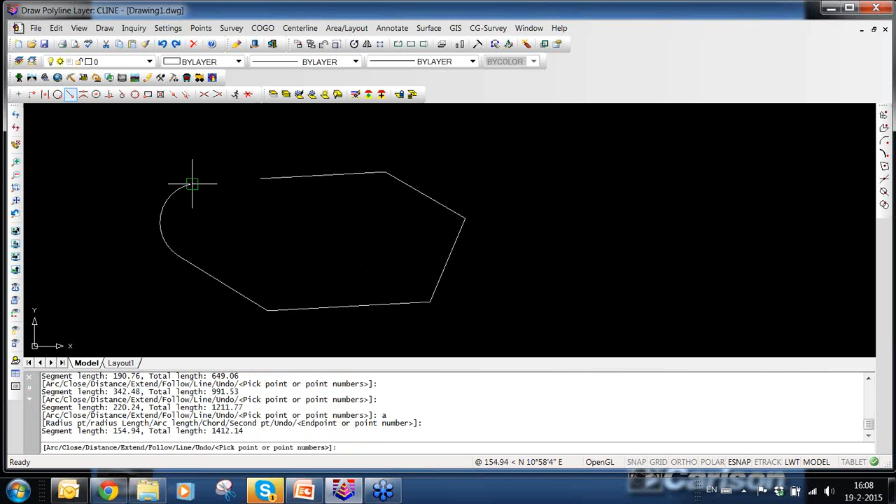Then of course it's a CAD system, so you have all your layer information. You can lock and freeze layers. You can do all sorts of drawings, so you have your polylines, and you can draw. You can create your arcs and everything, all the tools that you would be used to. Let's see what we can do here.

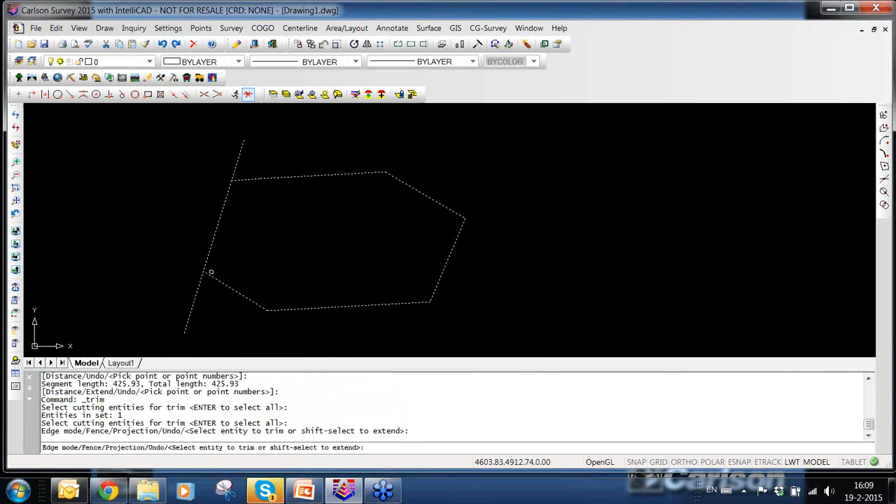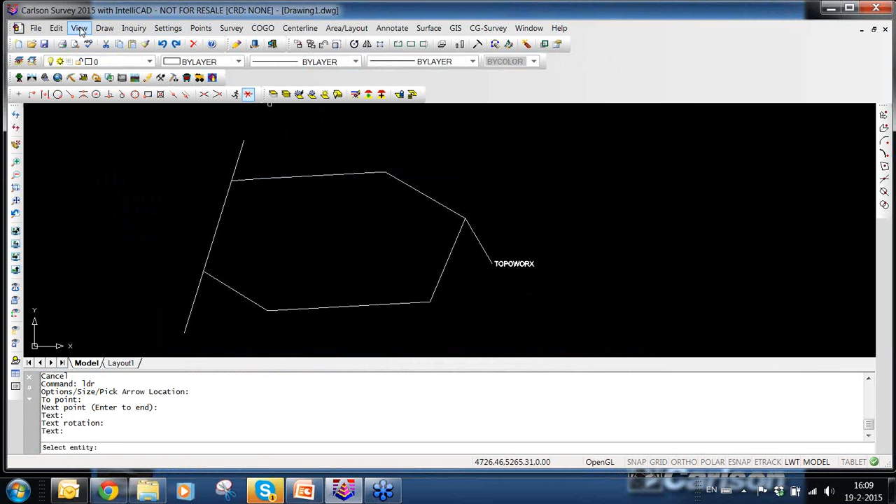Just draw another line, and you have your tools for trimming as well. So that's also standard. You have your leader with your text, all sorts of information. Let's see what we can show here. So all sorts of whatever you're used to with your CAD system, or what you would expect from a CAD system, is available here. So it's really a CAD system.

Okay, let's go back to another example. As I mentioned before, cleanup is very important. So, for instance, I can open a file, and it's a DXF file. Let's have a look at the file.

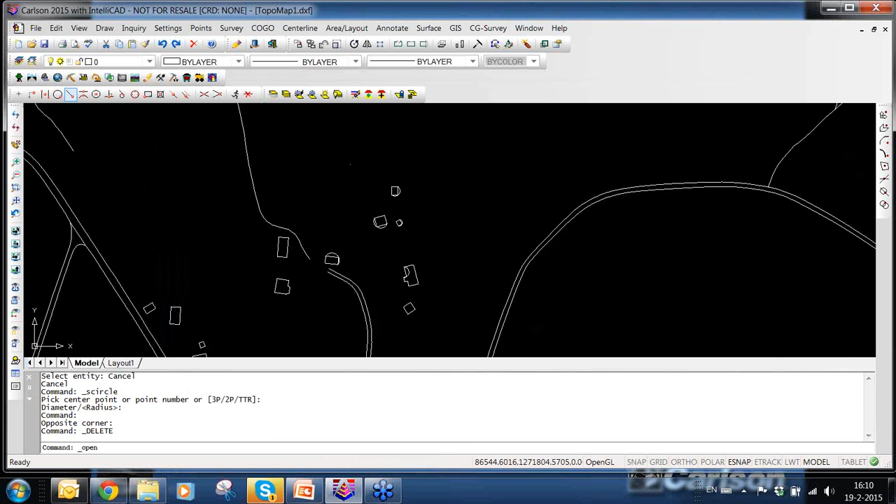As you can see, this is a large file. You can see here on the right-hand side, this is nearly 14 MB. That's a pretty serious file, especially if you want to put it into maybe your small data logger with SurvCE. So let's open this and see what it looks like. It's not spectacular, it's a simple topo file.

Cleanup: we go to drawing cleanup, and here you see a list of checks that the software will do. For instance, it will remove duplicate points, remove duplicate line work, erase all sorts of blank entities, and join line work with the same endpoints. That's very important for your closed polylines. Also, it will remove empty layers with no entities, and it will convert all sorts of entities that SurvCE doesn't like into polylines.

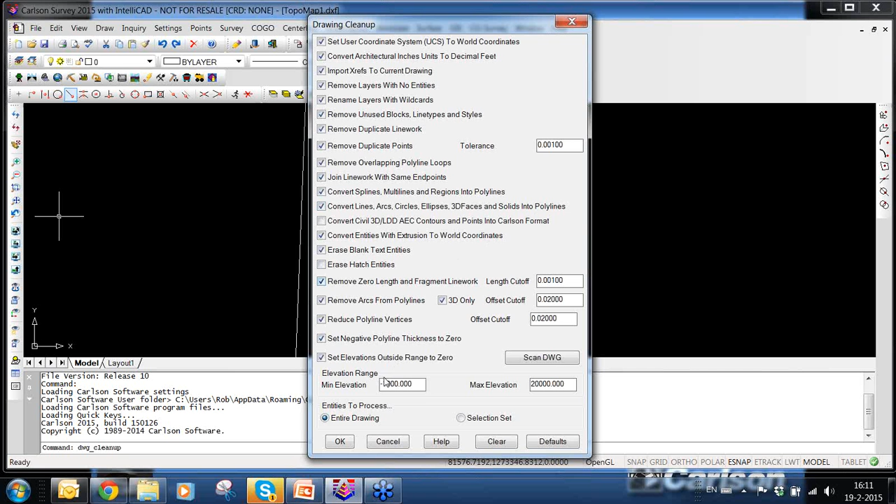So there are some entities that SurvCE doesn't like, solids for instance. You'll have a problem displaying these in SurvCE unless you use TopoWorx and cleanup to convert them into polylines, because SurvCE likes polylines as the basic entity in CAD, but doesn't like some of the other stuff. Okay, so let's see what happens.

So this takes a little bit of time because it's a large file, but this is a very useful option, and we have customers that basically purchased TopoWorx or Survey mainly for this option, because it's really great, not only to compress your file and make it smaller, but also to fix issues like polygons not really being closed or having overshoots, all that kind of stuff.

So it's now working on solving all these issues. It takes a little bit of time, like I said, it's a 14 MB file. So let's see what we'll end up with. What we'll see is the difference in size. Doing this cleanup should really result in a major reduction of the size of this file.

So it's still working. What it will also do is use the latest version of the DXF or DWG format, and that usually makes the file a lot smaller too. I think it's nearly done now. Checking the elevation range. Okay, so here's the report.

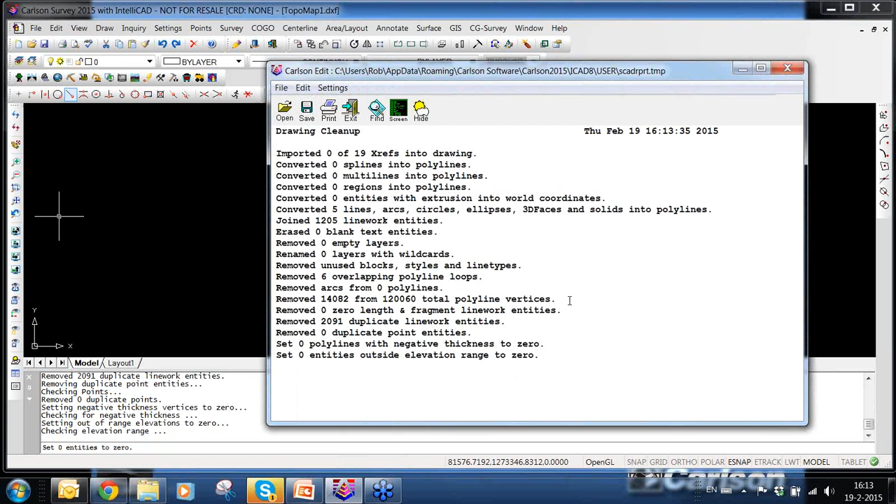So you see a lot of polyline vertices were removed, and line work entities were joined. It's very useful, this is also very important. There were some entities that SurvCE will not like, and these were converted into polylines. So that all looks pretty good.

And what I can do is save the file as a DXF. It's a standard DXF, and I can call this cleanup. And you can already see the reduction in size. So this is the original one, which is nearly 14 MB, and this is the cleaned one, which is 4.5 MB. That's a reduction of nearly 70%.

So obviously, this file will give you, only because of its size, a lot of problems in SurvCE, and this is a file that is much smaller and cleaned up. A lot of issues were solved, so that will work perfectly in SurvCE.

Okay, let's go to another example: preparing your stakeout. That's also important.

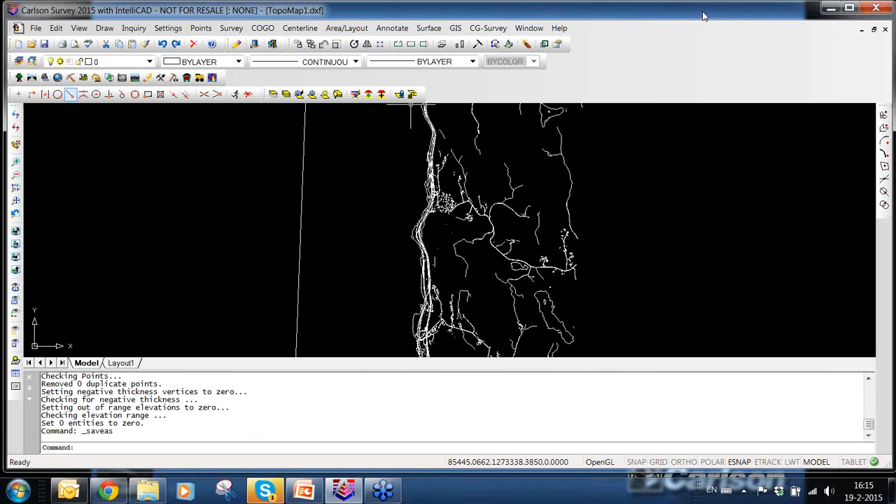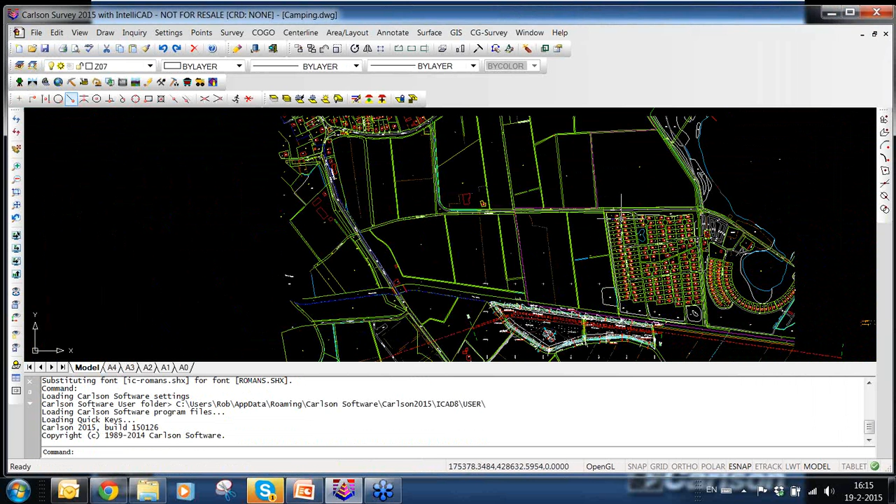So let's close this for a moment, and let's open a file. See a file here. Okay, so this is also a pretty large file. As you can see, if I zoom out, this is a big file. This is not a file you would want to load into SurvCE.

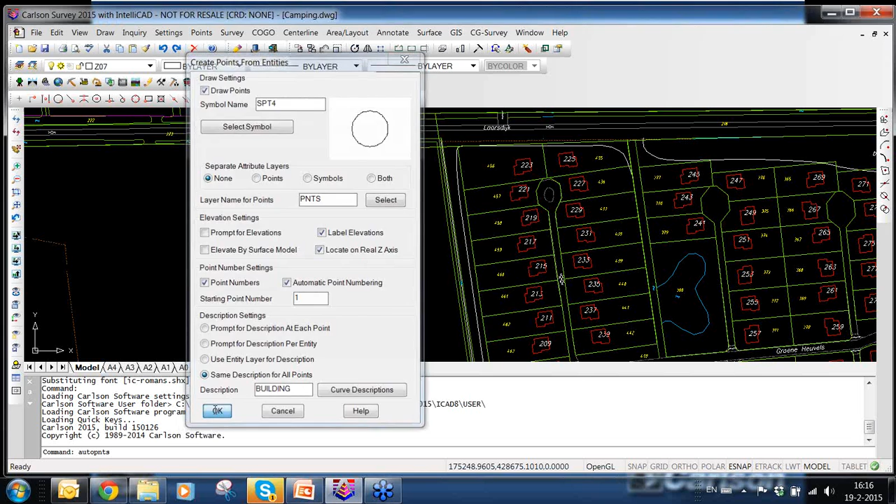So let's assume you just have to stake out some points. You don't need a complete DXF, you just need some points to stake out, and I can easily pick them from the map. So what I will do is I will go to COGO and say create points from entities. As a description, let's call this building like this. I'll just select points and give it a name, the CRD file.

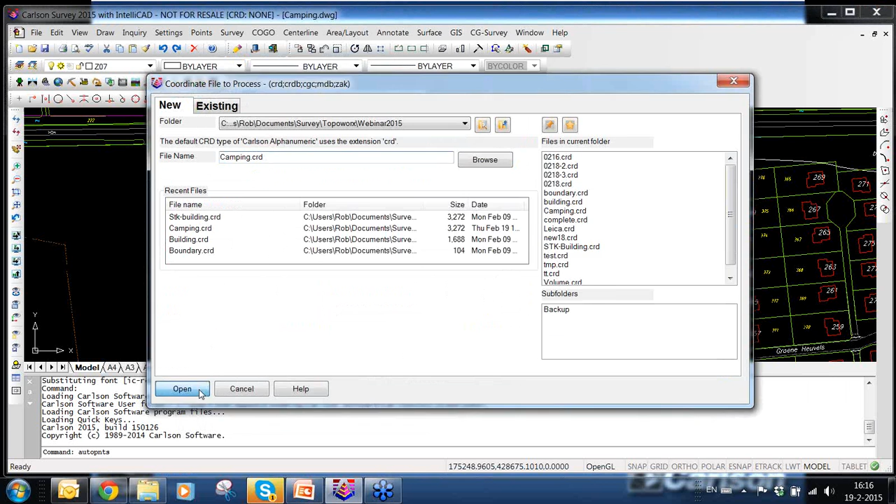You can already see I'm already creating a CRD file, so that is a SurvCE file. I'm not creating an ASCII text file that I have to later convert into the SurvCE format. I'm already creating a file ready for SurvCE. So I'll replace the current file, and I will take the points from this building, and here and here and here, just like that, and it will start to create my points.

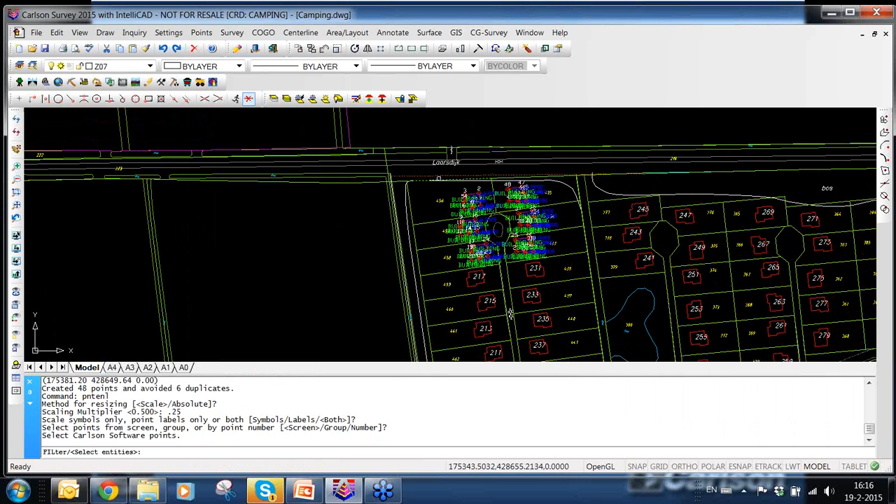It looks a little bit sloppy, so I can resize this a little bit like this, make it look a little bit nicer. So I've taken all these points, and I've immediately created a CRD file for SurvCE.

Of course, there are other possibilities. So if I would go to survey and to data collectors, then you see that we also support Leica, and also, for instance, the Leica DBX format. So depending on the area where you live in, the DBX format can be a standard. So you could be on a construction site where whatever instrument you use, everything has to be in DBX format.

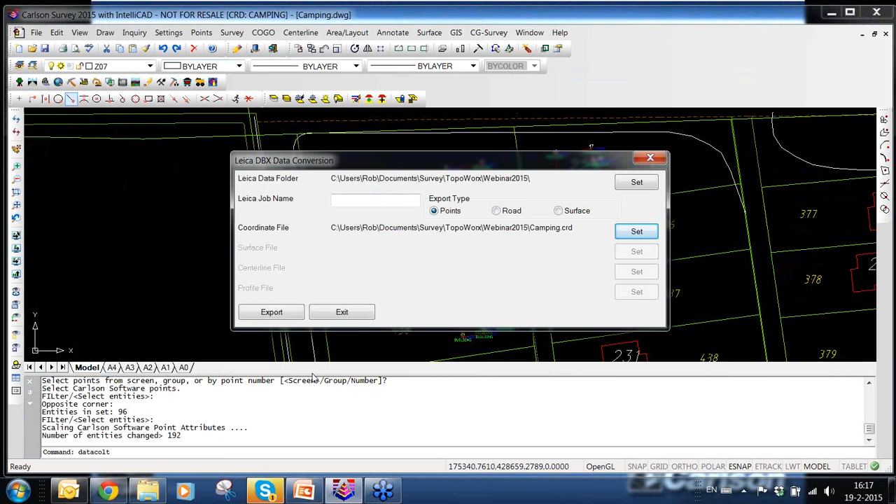So for TopoWorx, that's not a problem, because you can import DBX files, but you can also export DBX files. So you create a DBX job name for Leica, and you select the coordinate file that we just created, and then you can create data for Leica users. So just 100% focused on SurvCE, you can also create other formats for import and export.

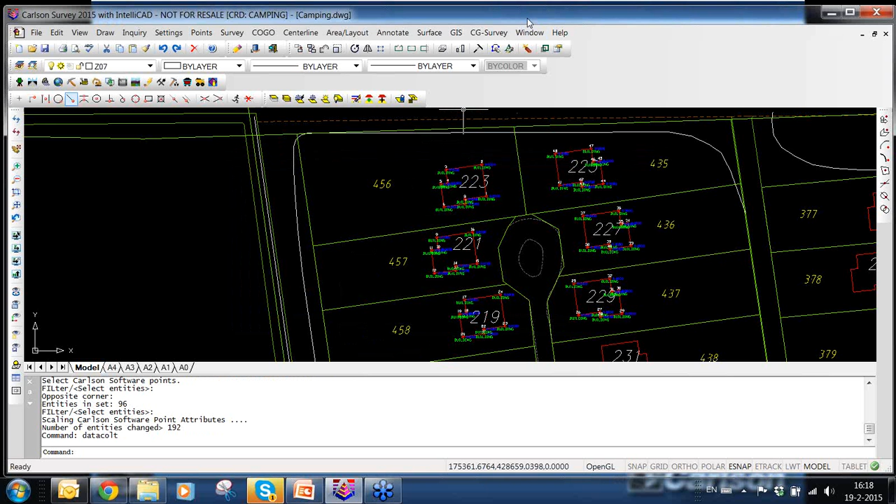Okay, now let's assume the situation where somebody has done the stakeout and you want to check the quality of the stakeout. So you want to prepare a cut sheet. So let's reopen this like this, and let's assume somebody's done the stakeout with SurvCE and comes back with a SurvCE job with the stakeout points, and we just want to see how well he's done.

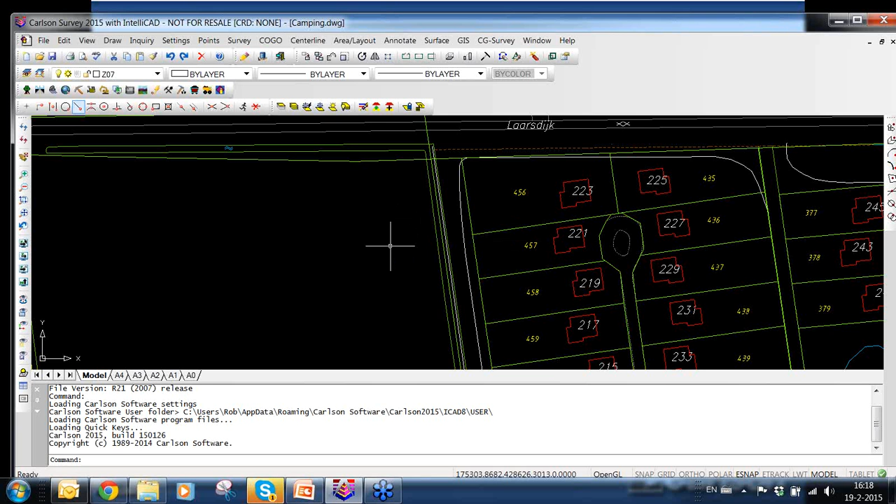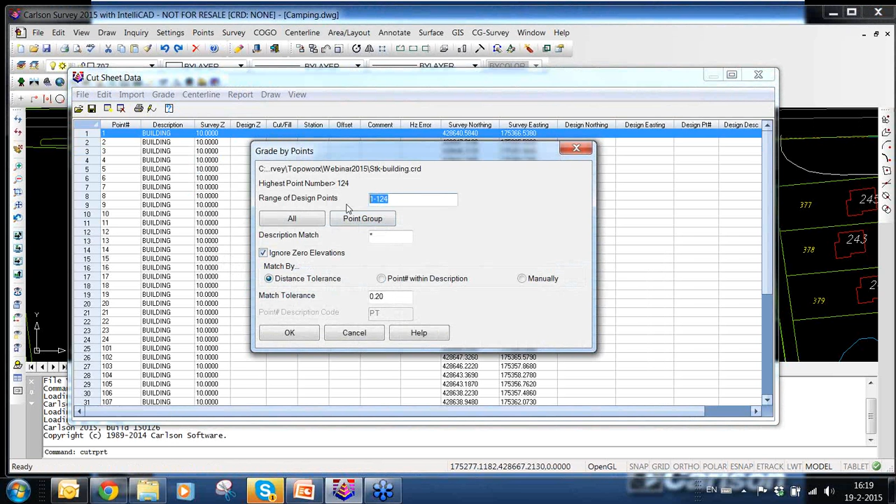There are also some cut sheet options in SurvCE, but we'll just look at what we have available here. So we go to survey and then to cut sheet, and then we'll import our cut sheet file. Let's assume the guy outside created a CRD file called stake building. So we open this file, and I know that the first 24 points were the design points, and I'm going to check on a tolerance of 20 centimeters, and I want to check the horizontal error. So there we are. I have a nice display, and I'm seeing my sorted horizontal error, the variation from 0, which is quite good, to 6 centimeters, which is a little bit much.

Again, you see how quick this goes. I just take the CRD file from SurvCE. I don't have to export to an ASCII file in between, and then read in the ASCII file into Excel, and in Excel try to make a sheet like this. It's already available in TopoWorx.

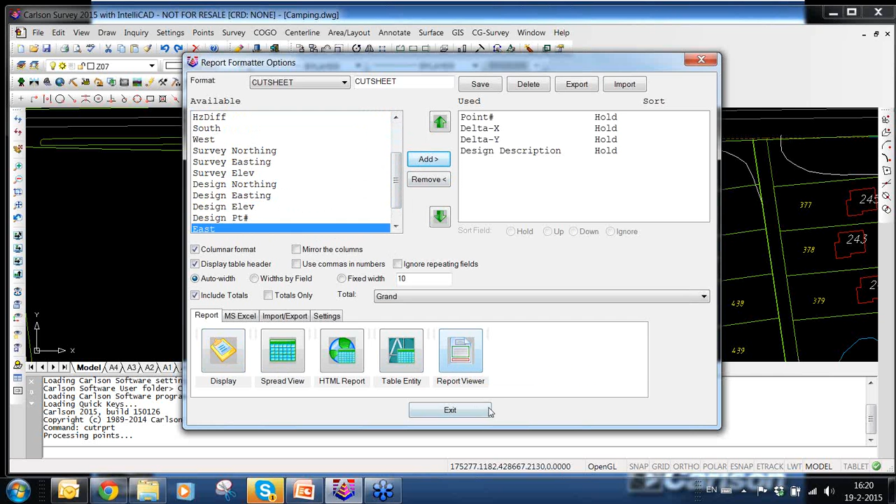I can create custom reports, so I can say create a report, and in my report I want to have my point number, and then maybe my delta values, maybe some comment, maybe my design description or whatever, and I can export this. I can export it as an Excel file, as a spreadsheet file, or I can simply display it and export it. So I have all these options available.

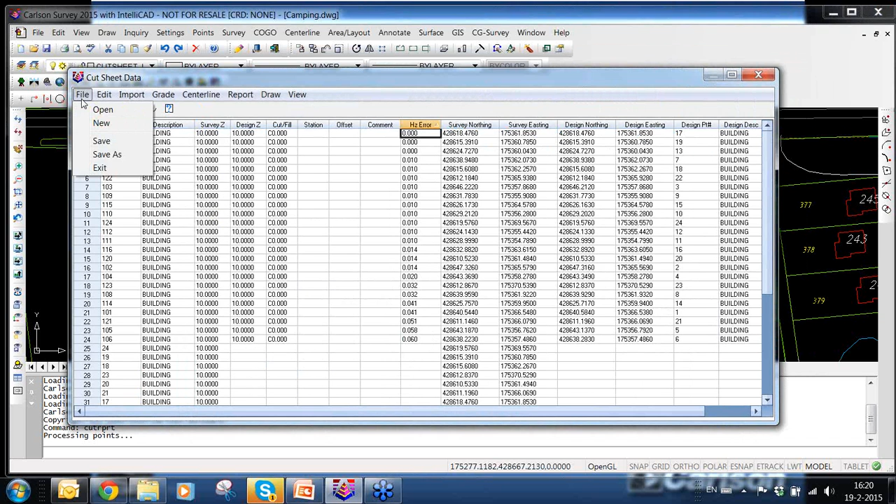What I can also do is show this information graphically. So I can say draw labels, because I want to see my deltas. We don't need this anymore, we need to change this. So then, as you can see here, you get the graphical information.

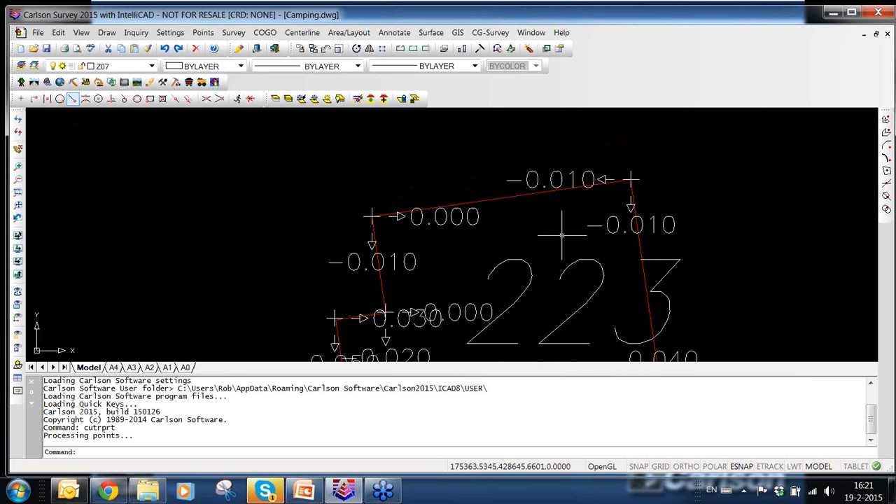So here, for instance, this point was a 0 difference in the easting and 6 centimeters in the northing, and this was 1 centimeter and 1 centimeter. So you can also immediately from the SurvCE job read it into TopoWorx, create a report, and even create a graphical display. So that's one of the useful features.

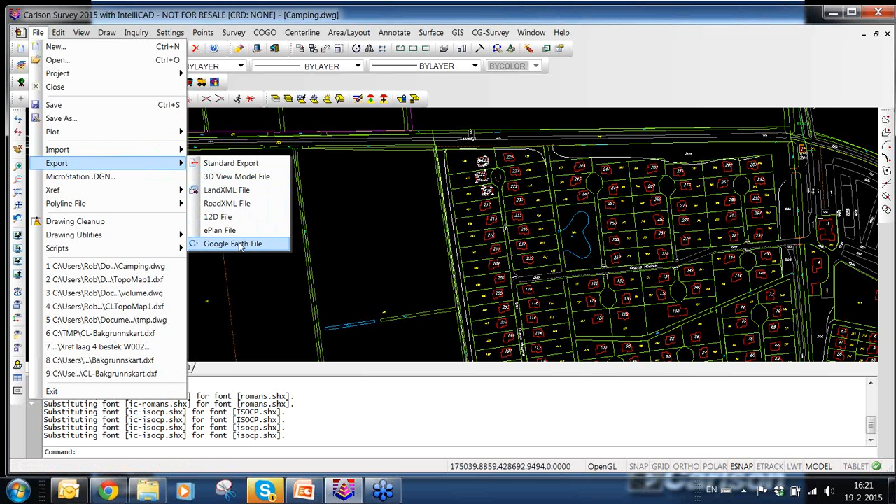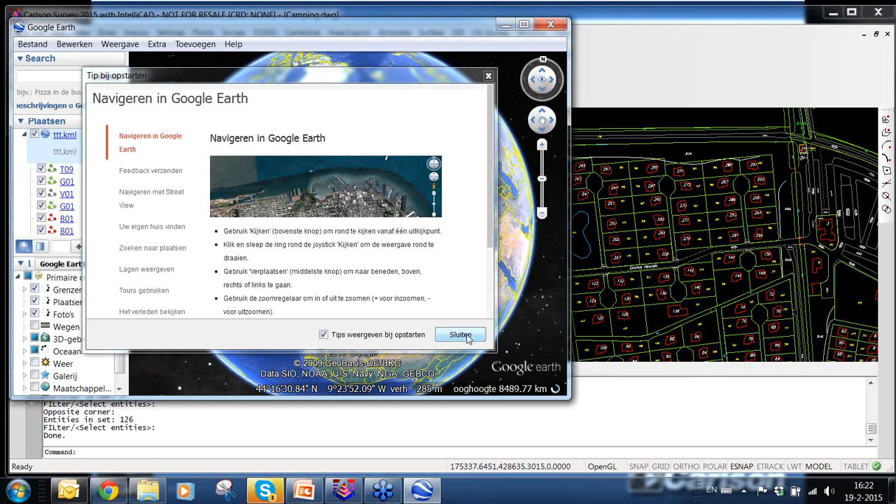What I can also do, which I think I mentioned before, is export using a Google background. I can export this as a Google Earth file, replace the current one, and make a selection like this to see what happens. I'll use Google Earth, and if my coordinate system was right, we should see the same information on the Google background. It's a bit of a challenge since part of my bandwidth is used for the webinar, so I'm not sure how this will work out, but we'll see.

Okay, so here's my information. You see that it did a pretty nice job displaying the information. So that's another option, a very useful one for sharing data.

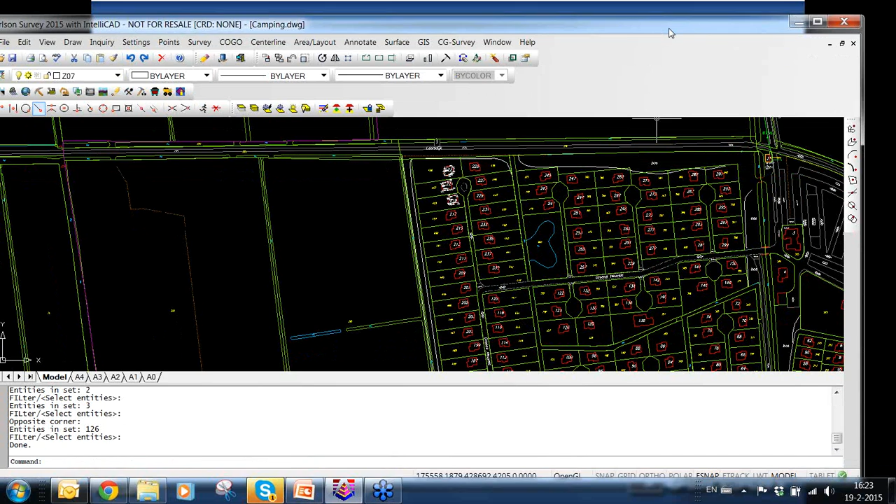Let's move over to another example: field to finish. Let's close this for a moment and go to field to finish. What a lot of people do is some field to finish in Carlson SurvCE, then create a DXF file in SurvCE and bring it into CAD. But they don't really like it because of issues - font size not being correct, problems with text size.

My advice would be, don't do that. Don't create a DXF file in SurvCE. Just bring your CRD file from SurvCE into TopoWorx and do your field to finish here, because TopoWorx is much more powerful and will save you a lot of time and frustration.

So what we'll do is set our coordinate file like this. I've just brought in the coordinate file from SurvCE, and then I go to field to finish, draw field to finish, and here I have a lot more control over my layers and whatever I want to do. This is the information from outside, and this is my code library - as you can see, I have much more options for my symbols and lines and whatever I want to do with the file.

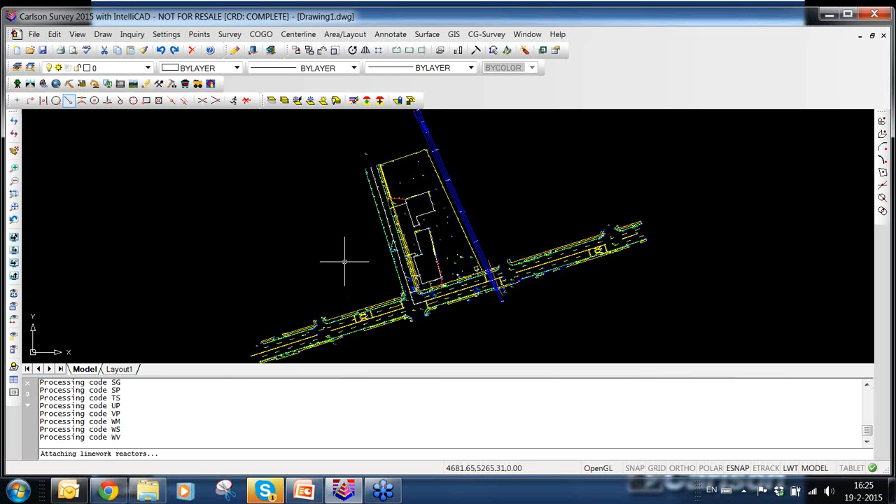At this point I can simply say OK, and it will start to process the code files and the special codes, turning it into a drawing. So here's my drawing. You see how easy that was and how much more control you have compared to SurvCE.

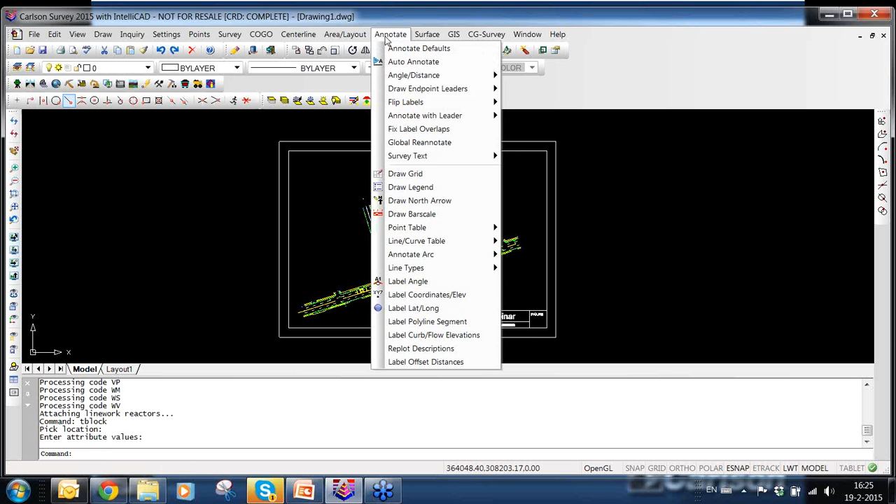And then I can simply turn this into a professional DXF file if I wanted to. Let's put something around it and give it a title like this. I could even put in a north arrow if I'd like, place it over here, and export it as a DXF or DWG file. So that's how easy it is to make a professional drawing straight away from SurvCE.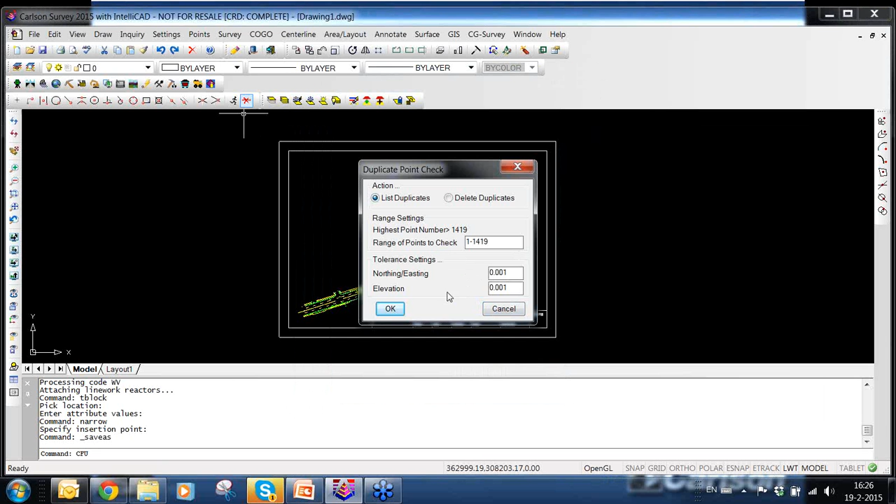What we haven't really discussed yet is the coordinate file utilities - these work on your SurvCE job file. For instance, I can very quickly check for duplicate points. I can set a tolerance of a millimeter, and it says no duplicate points, so that's good news.

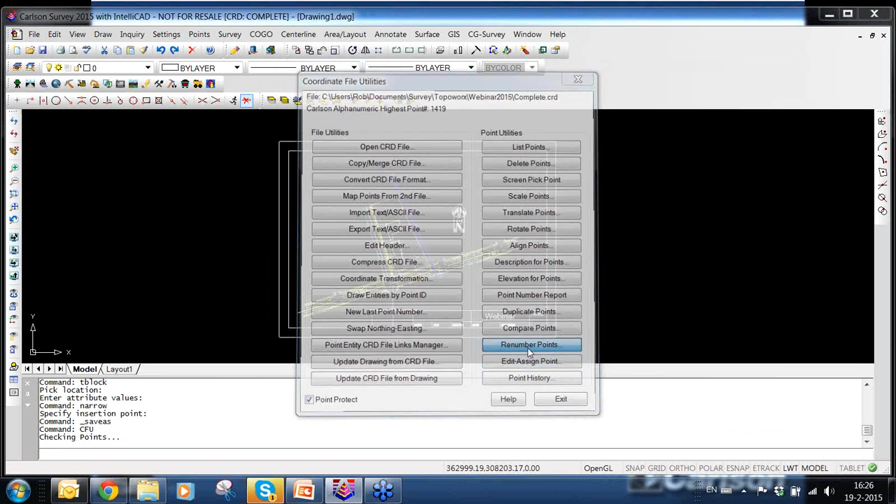I can also very quickly renumber the points. My points are now from, let's say, 1 to 1400. It could be that I don't like that because maybe there's going to be a conflict with other points, so I'll renumber this and start at 2000, and it will start to renumber the points. If you list the points now - list all - you see they are automatically renumbered.

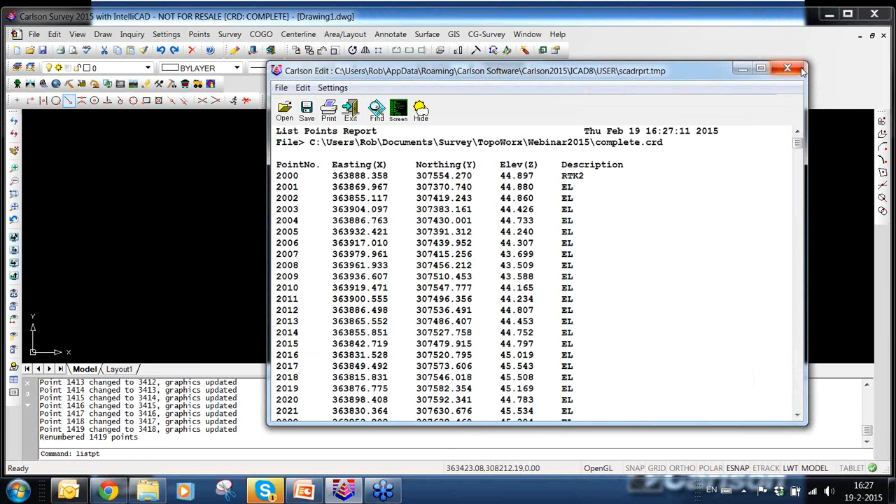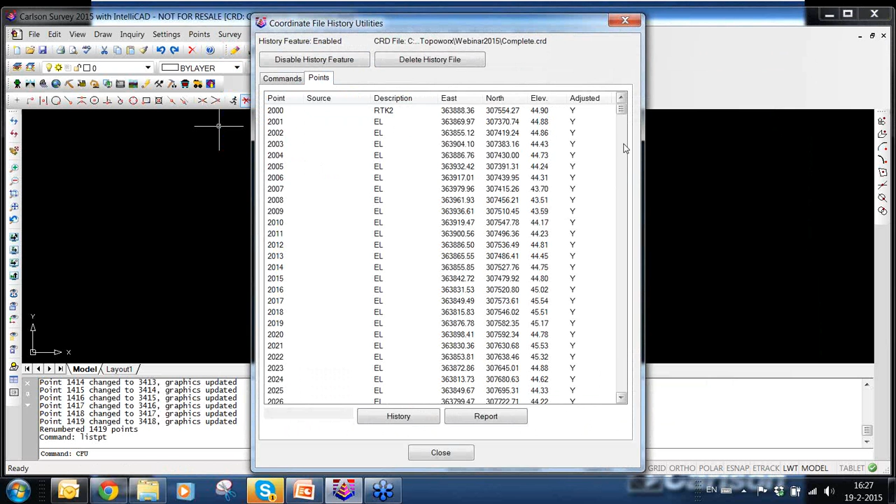What we also have as an option is to look at the point history. As you can see, I've already renumbered the points a couple of times - this is what I did today, this is what I did yesterday, and I also added a couple of points. This is very important if you work with multiple people on the same software and project - you can exactly see what has happened to the various points, the commands, and the points that were changed. That's very useful.

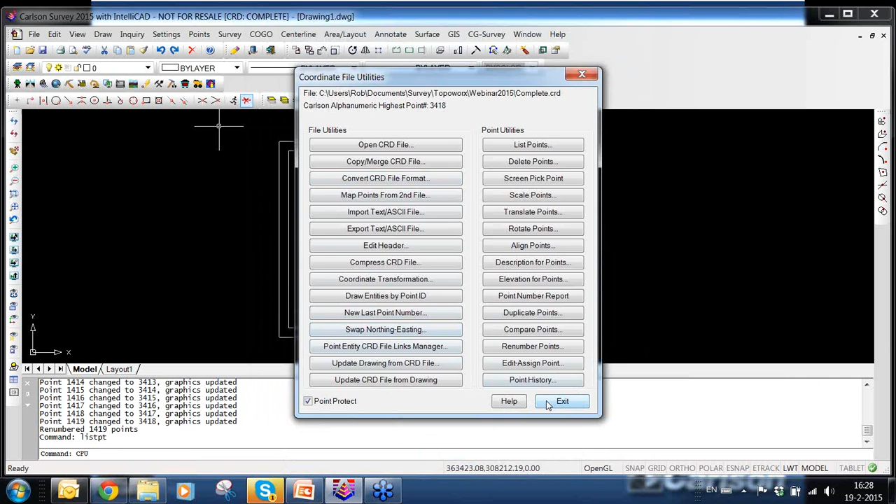Another one I'd like to point out: swap Northing and Easting. This is also very important if you made an error reading in an ASCII file and swapped the Easting and Northing. It seems like something obvious, but it actually means your whole drawing was mirrored. With swap Northing and Easting, you can fix that immediately. So that's extremely useful.

Okay, then let's look at the final example: volumes and profiles.

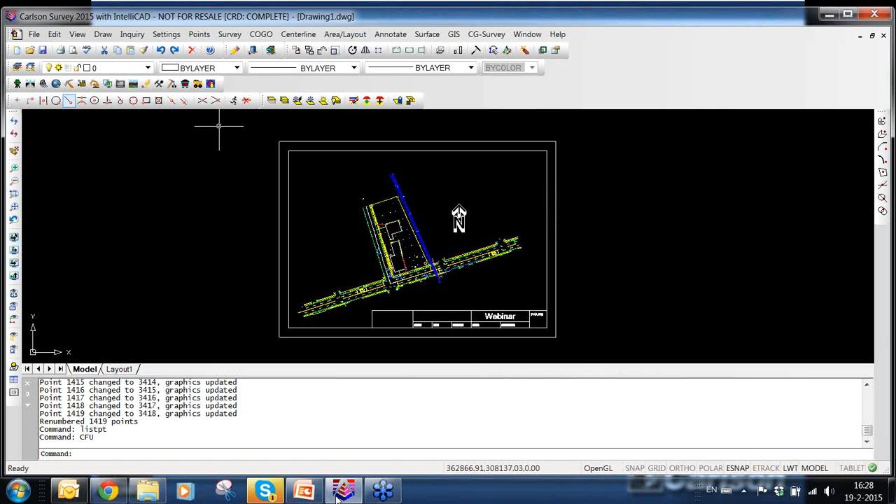Now, volume and profiles. Again, you can do a little bit of that in SurvCE, but of course in TopoWorx your options are much more powerful.

So let's close this and let's open this file. So here I have a 3D model, triangulation model, and I can have a 3D look in the 3D viewer. This is something that SurvCE doesn't have, but I can select it and I can look at it in the 3D viewer and go around it.

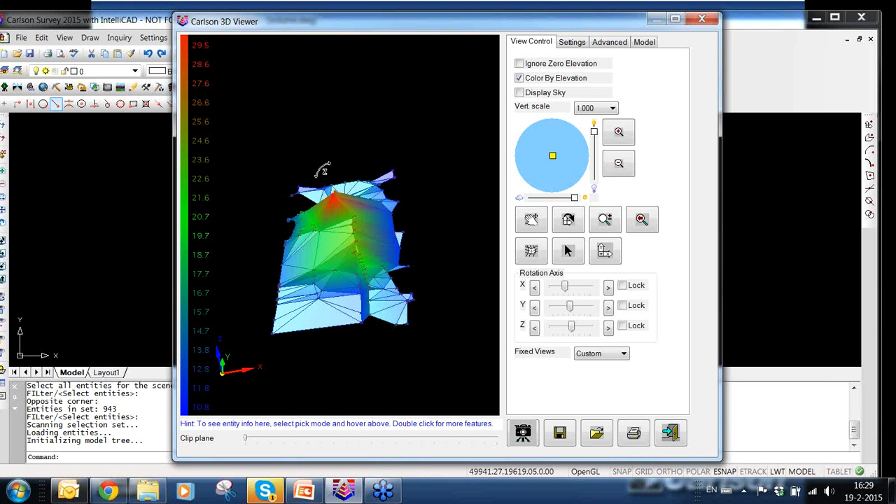Maybe do a little bit of exaggeration of the height to get a better view. So that's a very useful option.

Another useful option is of course profiles. So what I can do is I can make a quick profile. It's available in TopoWorx, and I can say let's go from north to south like this. And here you see my profile.

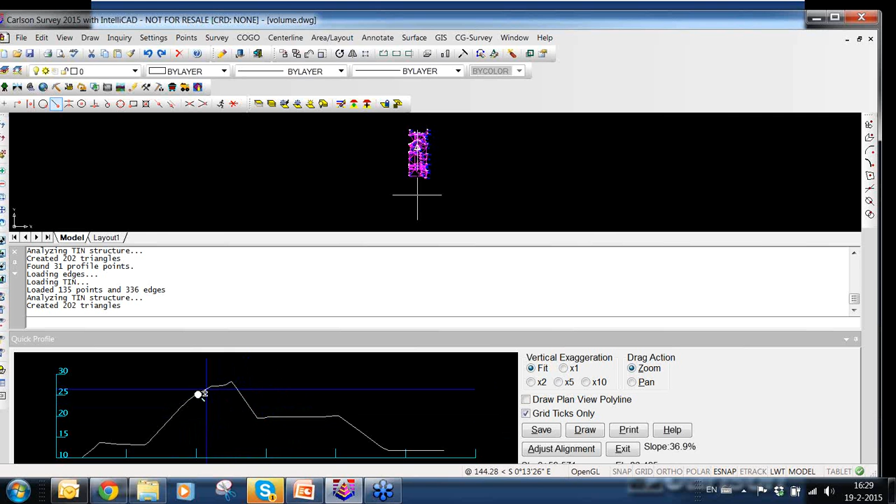You see my height, you see my slope available as well. Adjust alignment means that I can actually move my quick profile and change the direction of it. So that's a very useful option.

I can also save it, and I can say I will save this as a profile. It will create a name for it, and then I can say draw the profile.

So I can say draw the profile. It was just this file that I created. I'll say OK. Then there are a lot of options.

So I'm going to use my own settings. You can change the settings. There are a lot of settings, but you don't have to be afraid that you have to enter these settings again, because you can save them in a file. So I've entered my settings.

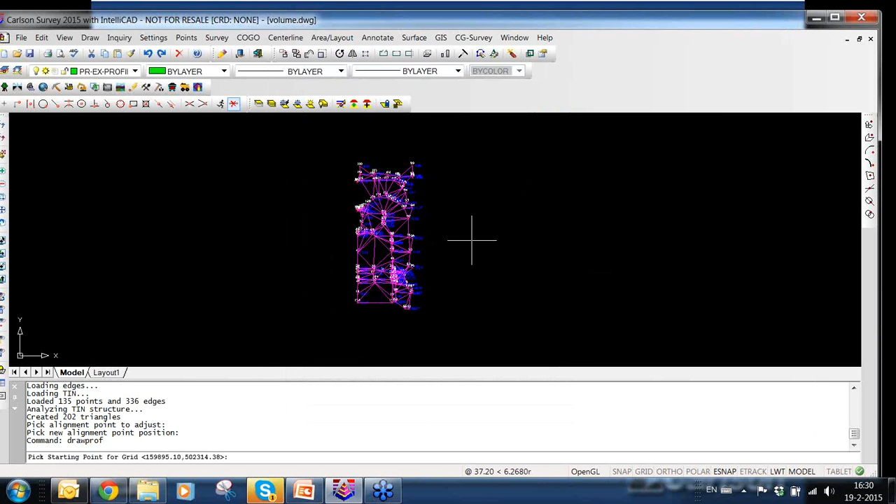Okay, these were just a couple of examples, and we're sort of near the end of this short seminar. So a little bit of a summary of what we did.

So TopoWorks is based on CAD. It's a CAD system, but it has a lot more. It has a lot of mapping tools. So it's not just simply a CAD system. It has more functionality.

Most important, it's really the perfect interface to SurvCE. It will save you a lot of time. It will save you a lot of conversions. It will save you a lot of frustrations. It will save Carlson a lot of support cases if you would be using TopoWorks together with SurvCE. That's just one of the main messages from this webinar.

Also, TopoWorks is very easy for localization, customization. We will add new formats. We will add new translations. So it's really very suited for our EMEA area.

Also, this is sort of a very easy entrance to the other Carlson office software. So like I said before, we have various office software. We have civil, very useful for roading. We have construction software, very useful for preparing all sorts of data. We have hydrology, we have mining, we have lots of other software, and TopoWorks is really an easy step, an easy first step into all this software.